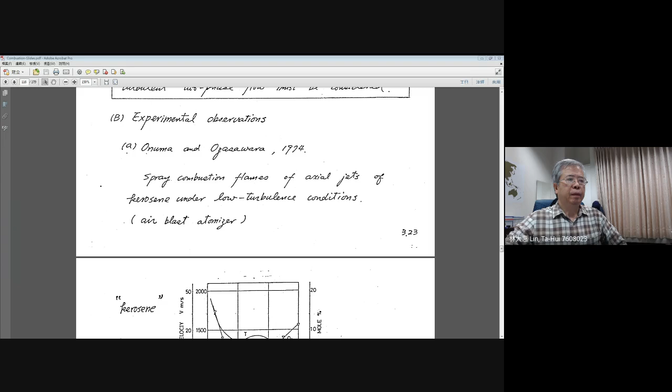Let's turn to lecture note 3.23.

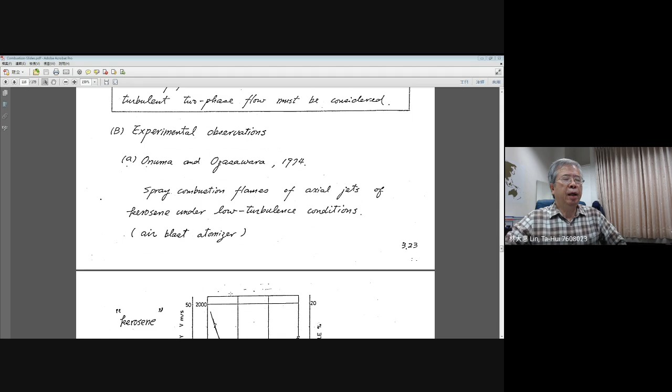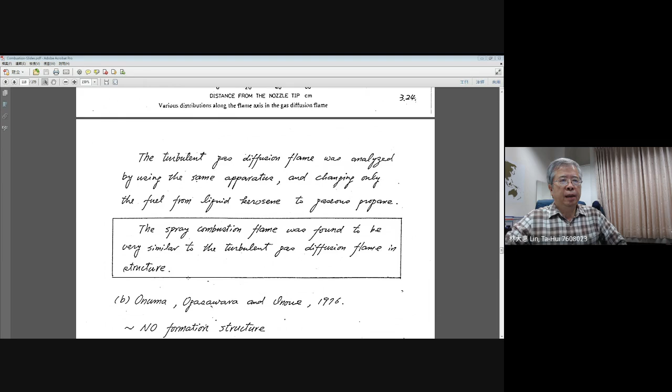We already explained the experimental result from Onuma and Ogasawara in 1974 based on concentration variation, temperature distribution, and fuel and oxygen distribution for a given kerosene spray flame compared with the propane diffusion flame. Based on the experimental comparisons, even for the next paper by the Onuma group in 1976 on NOx formation, they found the spray combustion flame was very similar to the turbulent gaseous diffusion flame in structure. We focus on the kerosene spray made by an air blast atomizer.

This means the spray is well atomized, and the kerosene has a lower boiling point, giving us some understanding of the spray structure. They can easily be gasified to provide fuel vapor to support the spray flame, and they have similar structures compared with the turbulent gaseous diffusion flame.

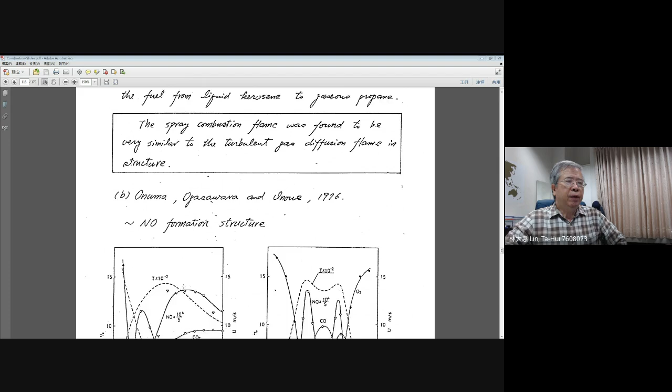But for the next paper, the third paper from the Onuma group, they try to give further understanding using different kinds of liquid fuel. Now they try to use heavy oil instead of the kerosene used before. But for the utilization of heavy oil, because it has a high boiling point, it is not easy to atomize, so people always use some kind of technology for heating the heavy oil.

Therefore, in this experiment, they try to enhance the fuel velocity and atomizing velocity of the atomizing air, and try to reduce the viscosity of the heavy oil by heating it to 100 degrees Celsius at the nozzle inlet. This will help the atomization for utilization of heavy oil.

Now they try to compare the various species concentrations and also temperature concentration for both heavy oil and kerosene spray flames.

Before they do the comparisons, they try to figure out the differences between the droplet number density distribution for heavy oil spray and kerosene spray. This is the initial size distribution of the droplets for heavy oil spray and kerosene spray in the experiment.

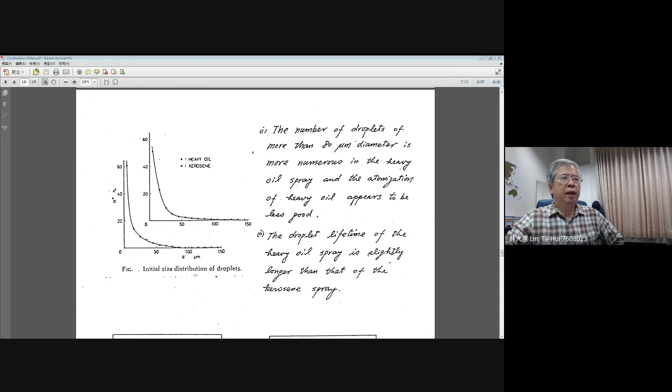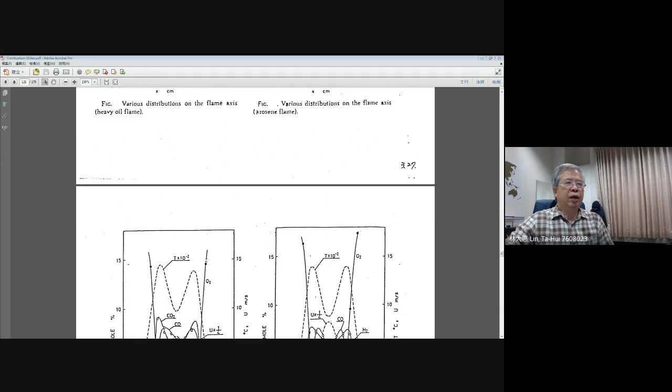They also look further to check the distributions along the radial direction, taking measurements for the cross section at x equal to 10 centimeters, a little away from the exit plane of the injector, to see the symmetric distribution for species concentrations, temperature, and velocities. They find these are quite similar for both cases.

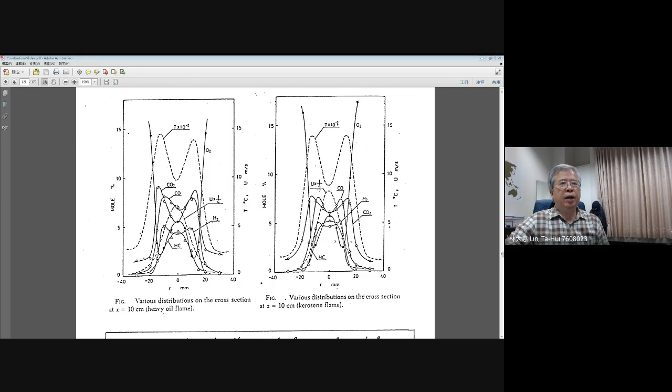They came to an important conclusion: by comparing the flames of heavy oil and kerosene under the same conditions, it was found that the occurrence of droplets is about the same for both flames. This may indicate that droplet behavior is not so different between these two flames.

The flames nearly coincide with regard to length and width, and the major distributions of various quantities are similar for both flames. This conclusion gives us the idea of how to use the gaseous diffusion flame to simulate possible locations of the spray flame.

But you should understand this conclusion is based on their particular experimental arrangement. In the earliest two papers, they used an air blast atomizer to provide well-atomized sprays, and they found similar flame structures for the spray and for gaseous propane.

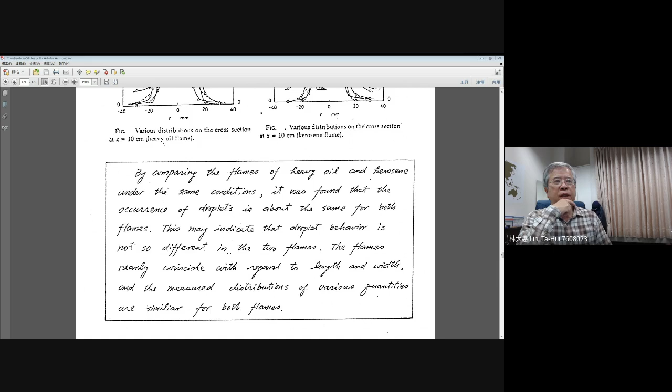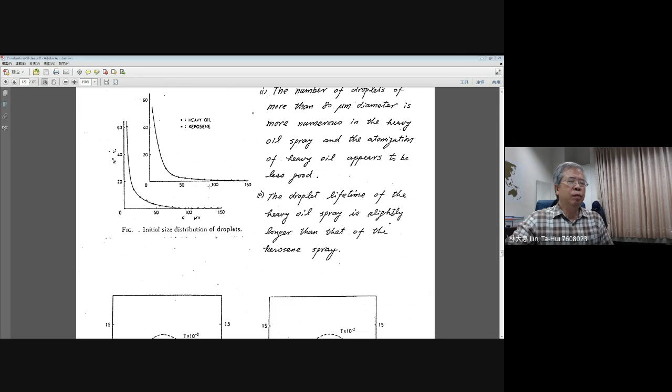For this paper, they try to make the heavy oil have good atomization, so they heat it to 100 degrees Celsius to reduce the viscosity. You can see the droplet size distribution - they almost have the same distribution, except the number of droplets larger than 80 micron shows a slight difference, but not too much. This means the droplet size distribution for kerosene spray and the heavy oil are quite the same.

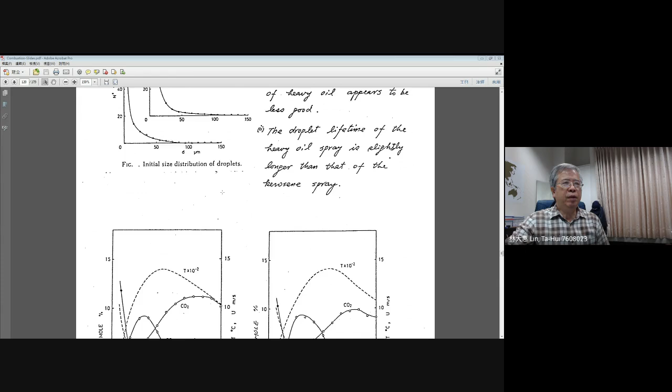In this sense, they may have a very similar spray flame structure. Up to here, they give a clear understanding that in general, if you look at a spray with good atomization, the droplet size distribution moves toward smaller droplet sizes, and they will have a larger spray angle with good mixing with air. Then the overall burning structure can be well described using a gaseous diffusion flame.

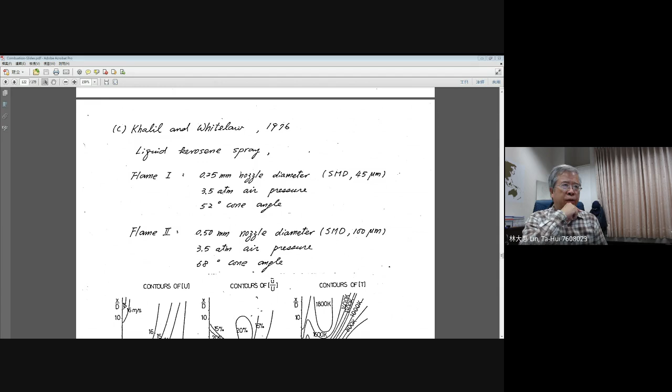But basically, you need to understand the heat release coming from the gaseous fuel should be very similar to that from the liquid fuel. For the next experiment, I will show you some differences in the flame structure comparing the gaseous flame and the spray flame.

This experimental work and simulation was reported by Khalil and Whitelaw in 1976. They considered liquid kerosene spray, using two different nozzles with diameter 0.25 millimeter as flame one, and the other 0.5 millimeter as flame two.

For flame one, they measured the droplet size distributions in the exit plane of the nozzle and found the Sauter mean diameter is around 45 micron. For the other, it's about 100 micron, which means spray flame two contains a larger droplet size distribution compared with spray flame one.

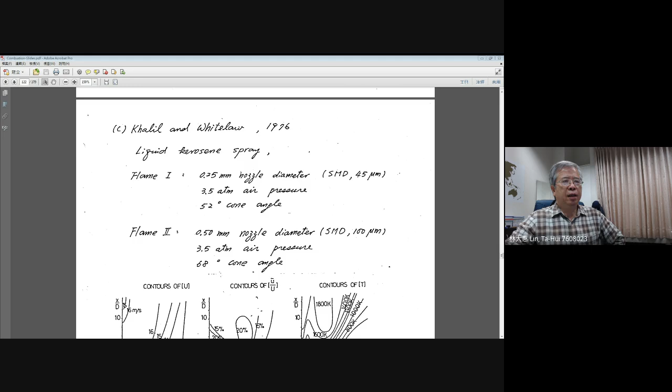They used the same air pressure, 3.5 atmospheric pressure, but the cone angles are different. Spray flame one has a smaller cone angle, influenced by the smaller nozzle diameter. Spray flame two, coming from a larger nozzle, has a wider cone angle of 68 degrees.

Now they perform the measurement and give us the overall flow structure, plotted as contours of axial velocity, velocity fluctuation, and temperature. You can see from this series of experimental observations - now we try to look at the differences between these two spray flames.

For spray flame one, first look at the contour of velocity and the contour of temperature. You can see initially the flow velocity inside the spray flame increases continuously toward the downstream, and there is some kind of boundary - the iso-velocity line shows the velocity decreasing toward the outer environment.

This can be compared with the temperature distribution in the contours of temperature. The isothermal line tells you there is a more dense region for the temperature variation, giving you an idea about the location of the spray flame. You may think the flame exists here, since at the flame location you will have the highest temperature and a larger temperature gradient reducing flame temperature to the surrounding temperature.

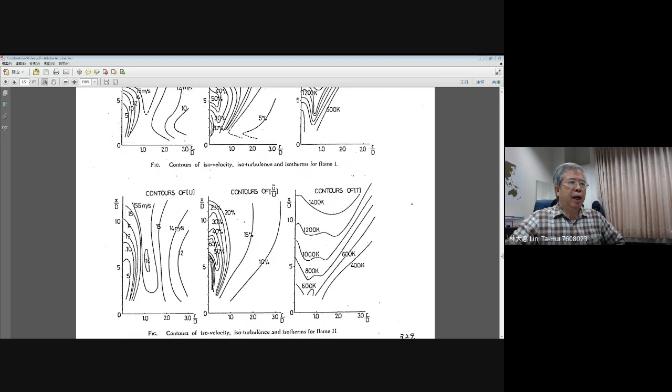50% is the maximum, but it reduces continuously toward the downstream because the droplets gasify and become smaller or disappear, so the velocity fluctuation will disappear. This is the first flow structure for spray flame one. The contours for iso-velocity, iso-turbulence, and isothermal for spray flame two are shown in these three figures.

And similarly, you can identify the spray flame is very close to the spray boundary, and this spray boundary shows this spray has a larger cone angle.

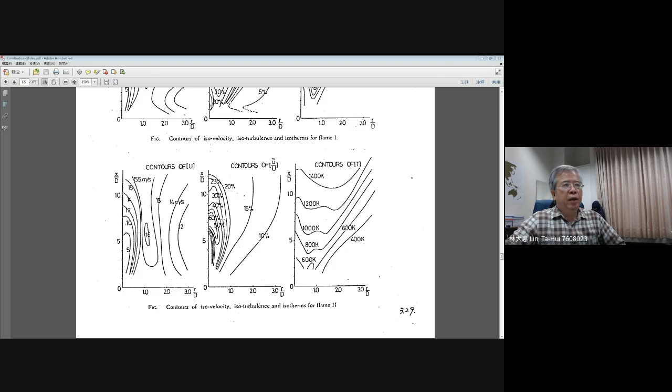Here you can see there is a larger velocity fluctuation in the interior of the spray for spray two. As you remember, spray two has a larger injector size, indicating larger droplets inside the spray cone, so the interaction becomes stronger.

And this still shows the velocity distribution, with the steep velocity variation coinciding with the spray angle.

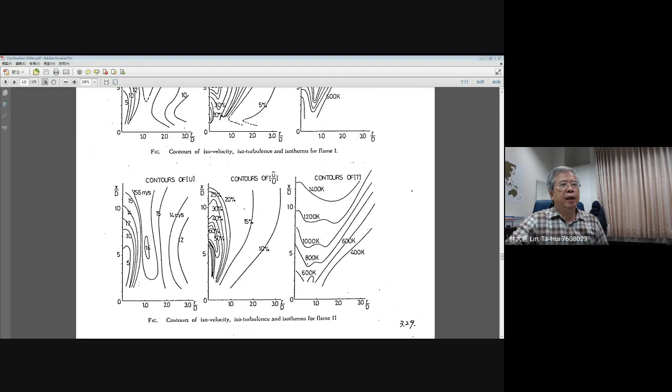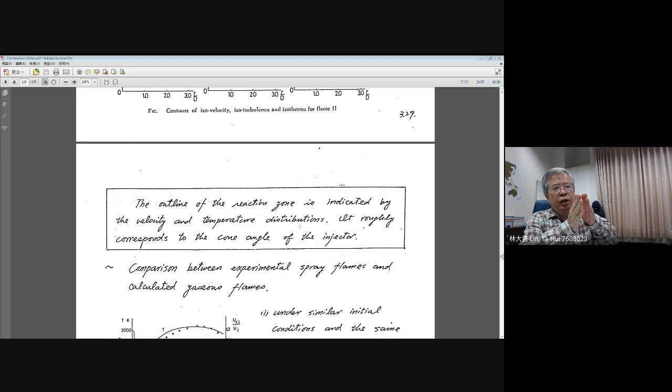From this kind of comparison, they find out the outline of the reaction zone. That means the flame zone, the spray flame, is indicated by the velocity and temperature distributions, especially the very steep variation in temperature distribution, which roughly corresponds to the cone angle of the injector.

These experimental results give some idea that usually the spray diffusion flame is very close to the boundary of the spray core. This is suggested from our previous discussion, because these diffusion flames are supported by the evaporated fuel vapor coming out from the cold core.

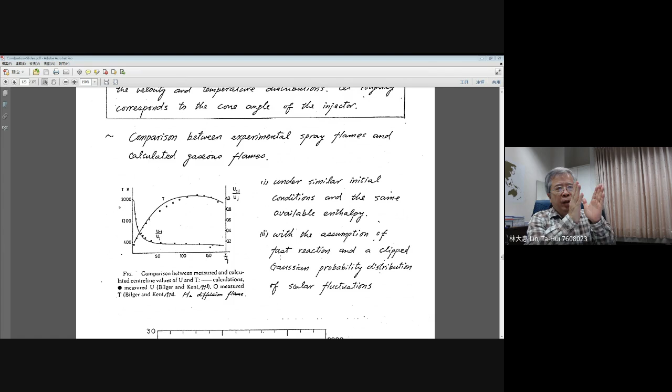The fuel vapor coming out mainly depends on diffusion, so it cannot extend too far. Therefore, the diffusion flame is very close to the spray cone boundary.

For the final experiment in the paper, they try to identify the differences between the structures for the spray flame and the gaseous flame, but they use simulations for comparison. Let me describe the mechanism for the simulations.

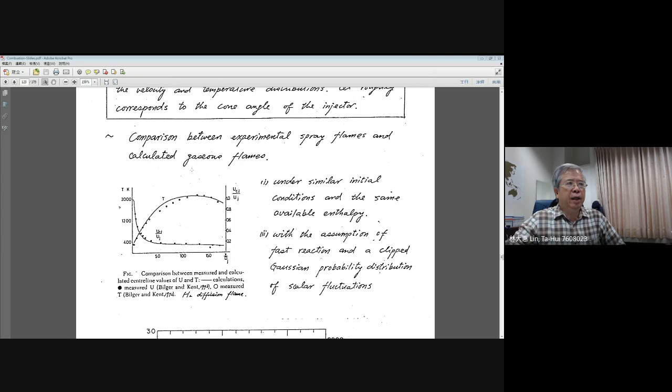They want to compare the experimental spray flames with the calculated gaseous flame. How do they do the calculations? They try to develop their numerical schemes and compare with existing experiment data.

They use similar initial conditions and the same available enthalpy, required for the simulation, and assume fast reaction with a presumed Gaussian probability distribution for scalar fluctuation.

Because they just do simulations on the gaseous flame, they use the calculated gaseous flame to compare with the experimental spray flame.

These kinds of scalar fluctuations are described by a probability distribution, a Gaussian distribution. This simulation mechanism is basically used to compare with experiment data based on the hydrogen diffusion flame.

This is the results, and the experiment data was taken from Bilger and Kent in 1974 for the hydrogen diffusion flame. In the first stage, they try to justify the correctness on their simulation.

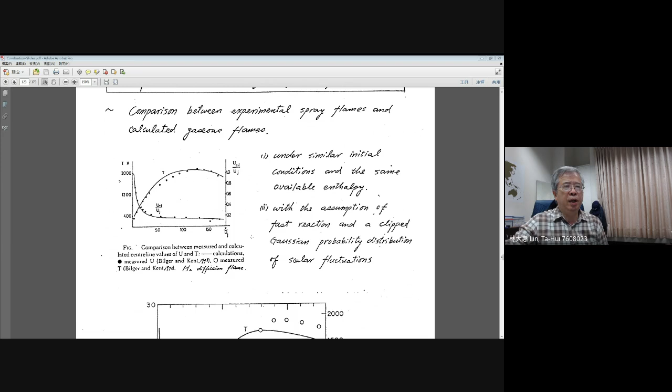Then they go to the next step. They use their simulation mechanism to get results to compare with the results from flame 1 and flame 2.

This is the first comparison, and the solid line curves represent the simulated results, while the open circle symbols and the inverted triangle symbols represent the experiment measurement, especially for spray flame 1.

Here you can see there is good agreement between the simulation result and the experiment result for the axial velocity u.

This is the distribution along the center line, for varying axial positions.

But the temperature is underestimated, especially in the downstream region, and the highest temperature occurs earlier for the gaseous flame compared with the spray flame. The maximum temperature is also smaller compared with that for spray flame 1.

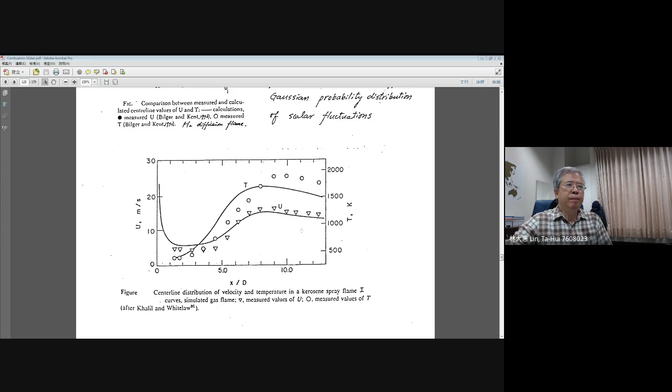Furthermore, they bring spray 1, spray 2, and the gaseous flame together and look at the temperature distribution along the radial direction for given axial positions. The left hand side is the upstream region, and the right hand side, x over d equal to 7.15, represents the downstream region.

You can find the comparison between the calculated results for the gaseous phase, indicated by the curve, and the two measurements from spray 1 and spray 2.

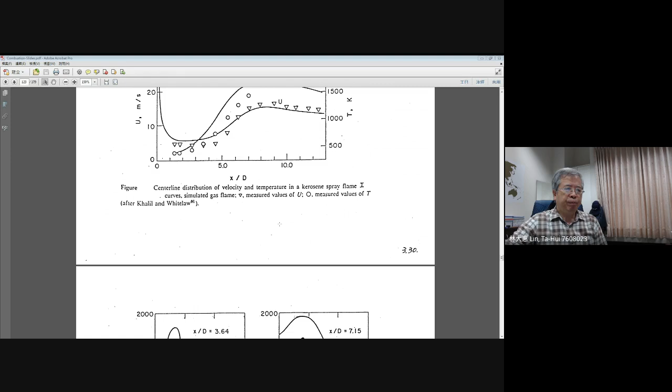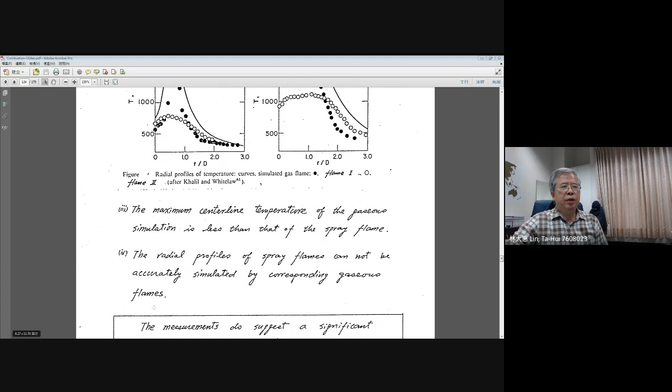When you look at the radial distribution for temperatures, the radial profile of the spray flame cannot be accurately simulated by the corresponding gaseous flame. There's a big discrepancy in the upstream region and also in the downstream regions. The measurements suggest a significant shortening of the flame length as the droplet size is decreased.

The droplet size decreased from SMD of 100 micron to 45 micron. This is confirmed from experimental observation: the flame length is shorter for spray flame 1 compared with spray flame 2, and the simulated gaseous flame is even shorter than the 45 micron spray flame. Actually, the gaseous diffusion flame had the shortest flame length.

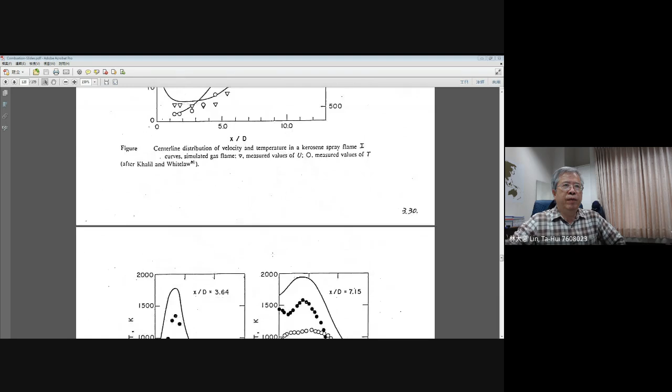These characteristics can be viewed from the temperature distribution. When the maximum temperature occurs, then the temperature decreases, meaning the burning becomes weaker. Finally it disappears, marking the end of the flame length.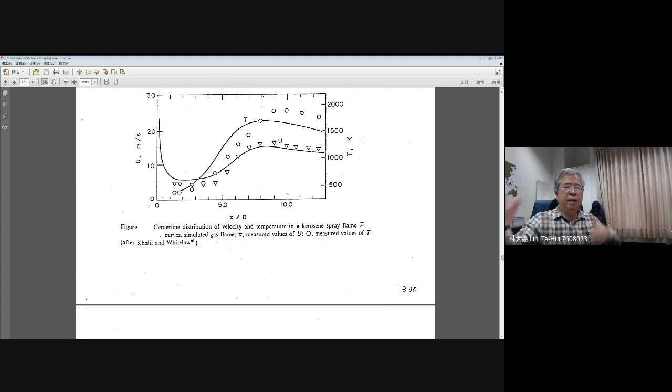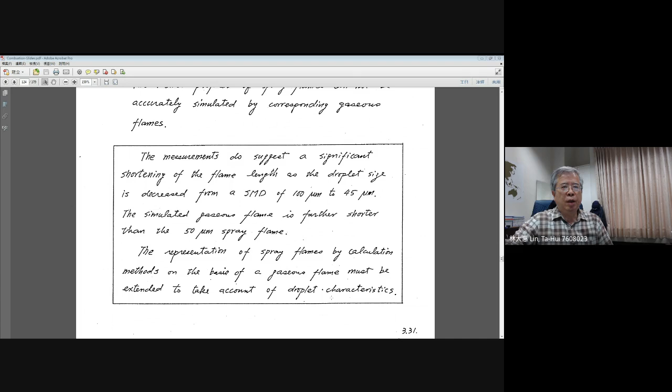The most important observation is that the representation of spray flame by calculation methods on the basis of gaseous flame must be extended to take account of droplet characteristics. This is a very important conclusion to consider, especially when introducing spray with larger droplets.

With larger droplets, you need to think about the droplet lifetime. They will extend their appearance further downstream, which will extend the burning process to a longer distance. That means you need to take account of droplet characteristics.

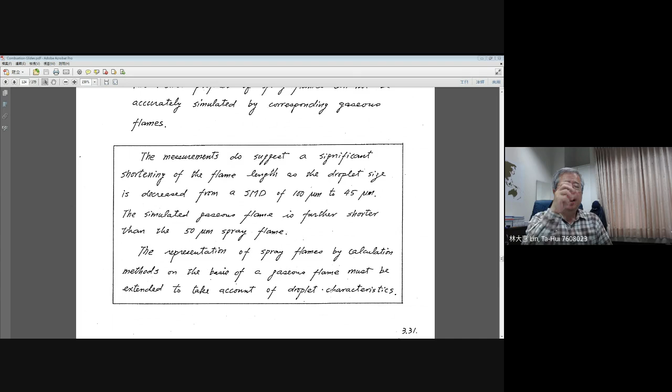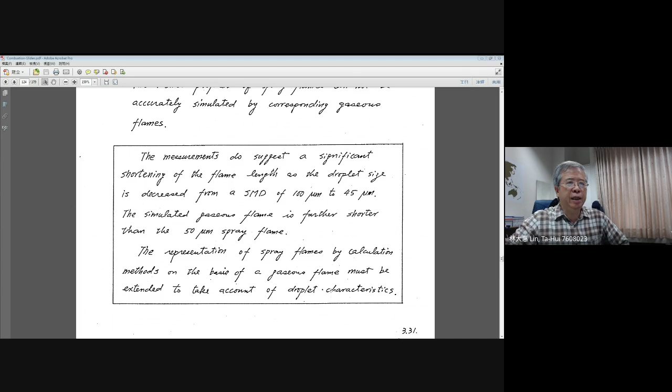By these two comparisons, one experimental result from Onuma's series experiment, the other from the Khalil and Whitelaw experiment, they tell you that in some cases, if you use well atomizers, you may try to use the gaseous diffusion flame to simulate the spray flame in reality. But if your atomizer provides larger droplets, you need to consider their existence because their lifetime is longer and they will extend the burning process to further downstream. You need to consider the droplet characteristics for those kinds of spray.

Finally, I want to give a conclusion, especially introduced by Chigier and Roett in 1972. This is a very nice conclusion you should remember. They try to use the velocity profile at a cross section for a given axial distance away from the injection port to let you know the velocity distributions for different kinds of jets. There is a full comparison.

One is the so-called isothermal free jet, this is a cold jet. The second is an isothermal spray, a cold spray injecting out. The third is a spray with combustion, meaning a spray flame with a spray core. And finally a gaseous diffusion flame, purely gaseous fuel burning. They bring these four jets together to investigate the velocity distribution for each, to let you have some comparison.

But the main idea is this: they try to introduce a so-called distribution function for the velocity profile, expressed by an exponential function. The left-hand side represents U, the average axial velocity, capital U bar, and in the denominator represents the maximum axial velocity, which occurs at the center point, at r equal to 0 along the center line.

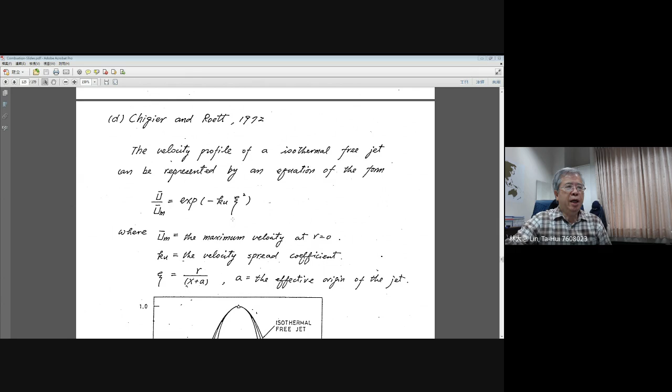The most important thing is the Ku, which represents the spread coefficient, velocity spread coefficient. If you have a large Ku, that means the velocity is more concentrated in a small region. But if you have a small Ku, that means the velocity distribution will spread to a larger region.

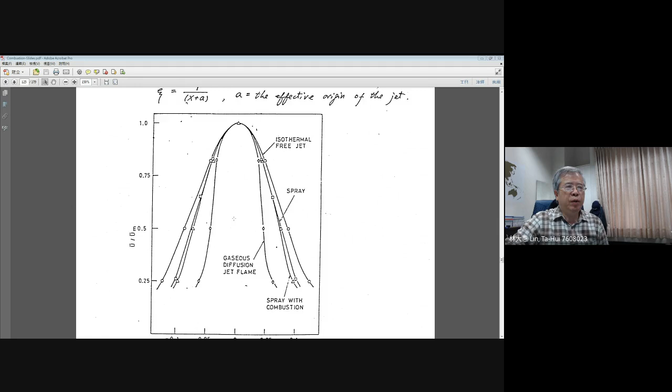For example, for the isothermal free jet, indicated by the diamond and circle, they have a smaller Ku, around 92. For the isothermal spray, indicated by the square symbol, and the triangle symbol representing spray with combustion, both are very close together, equal, and the Ku is approximately 130. 130 is larger than 92.

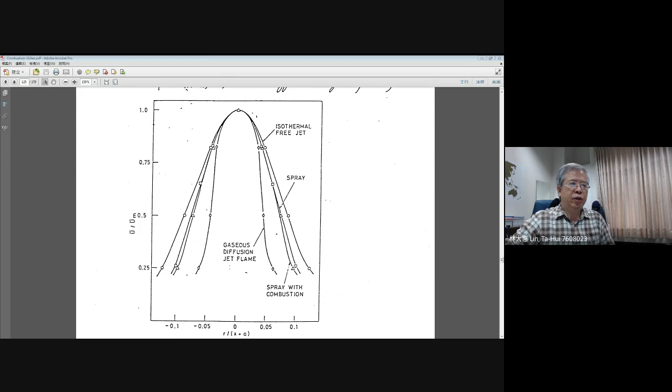That means the velocity distribution spreads wider compared with the gaseous diffusion flame. The gaseous diffusion flame has Ku equal to 360, but isothermal free jet has the smaller Ku, giving a wider spreading. The gaseous diffusion flame, the diamond shaped curve, actually has a larger Ku value.

Now let us try to understand the differences between these four jets. The first one, we try to consider the isothermal spray and also the isothermal free jet. Isothermal free jet Ku equals 92.

You can see the line with the open circle, and the spray is around here. The isothermal spray has a larger Ku compared with isothermal free jet, 130 compared with 92. The reason is the droplets of isothermal spray retain their momentum for a longer period of time compared with the equivalent fluid particles of isothermal free jet.

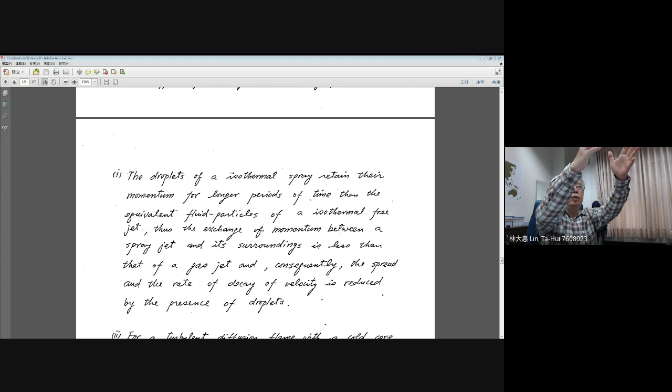That means the exchange of momentum between the spray and the surrounding is less compared with the gaseous jet, since the droplets have inertia and continue forward to the downstream. The spreading in the radial direction is less compared with the gaseous cold jet. Consequently, the spread, or the rate of decay of velocity, is reduced by the presence of droplets. This is the first comparison between the isothermal free jet and isothermal spray.

Those curves are confirmed by experimental data, and for the isothermal spray, the data came from Hestroni and Sokolov in 1971. This is the first comparison for the cold jet of gaseous and spray.

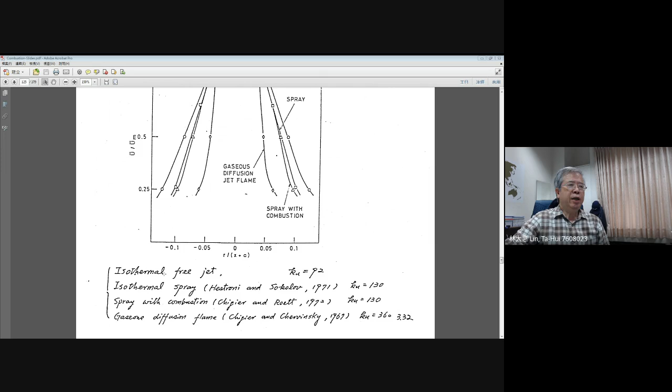The next comparison is for the turbulent diffusion flame with and without burning. We look at the gaseous jet with and without burning. The gaseous cold jet, represented by the isothermal free jet, has a larger, wider spreading.

But for the gaseous diffusion flame, they have the smallest spreading. It's definitely easier to see when you have a flame, and you generate a flame, the flame is always very close to the boundary of your jet, as we described for the jet diffusion flame.

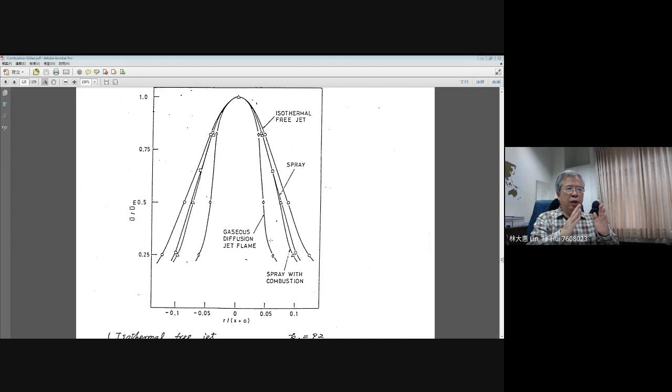This flame has the highest temperature at its location, and this flame will have some thermal expansion to prevent the gaseous jet, the inner gaseous jet, from mixing or expanding to the surroundings. This means that when a diffusion flame exists surrounding the cold jet, this high temperature boundary will push the cold gases and try to resist the expansion of the cold jet.

So this is the comparison: the gaseous diffusion flame has the largest Ku, equal to 360, and it cannot have wide spreading for a given axial position.

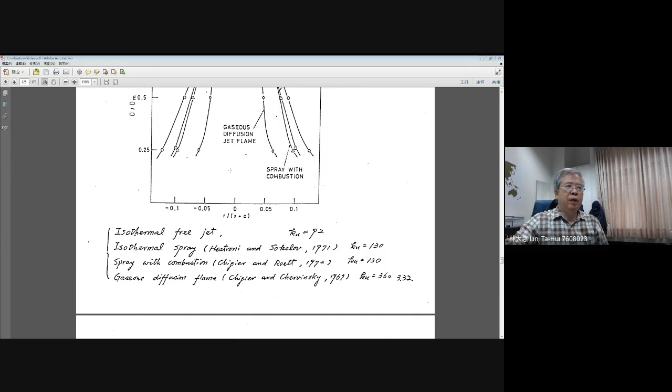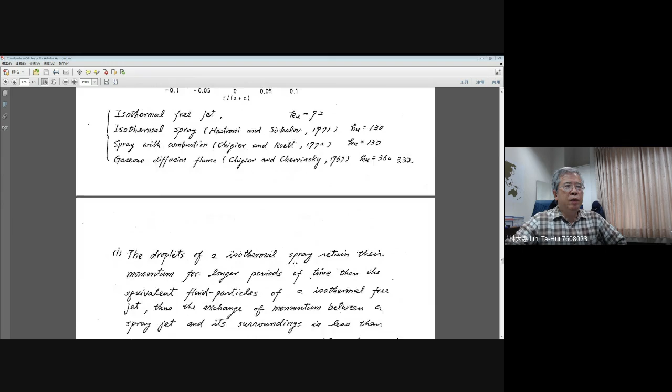Finally, the comparison between the cold spray and the burning spray: there are two curves, one indicated by a square symbol and the other by a triangle symbol. Actually they are almost the same, which means the spray diffusion flame is almost attached to the boundary of the spray core.

The value of Ku in the burning spray is closer to that of the isothermal spray. This indicates that in the region of the spray where Chigier and Roett's 1972 measurements apply, the effect of the presence of droplets was dominant and more significant than the presence of flame, meaning that when you still have a spray, the fuel vapor supplied by the droplets becomes more important.

Since in the whole region of the spray core they have gasification from beginning to end, they continuously provide fuel vapor. That fuel vapor needs to be supported by droplet gasification, meaning the supply and diffusion of fuel vapor is limited by the gasification process of the droplet.

Those fuel vapors cannot be strong enough to push the diffusion flame away from the spray core boundary. So the spray diffusion flame is always very close to the spray core boundary, because they are waiting for enough supply of fuel vapor coming out to maintain the spray flame burning.

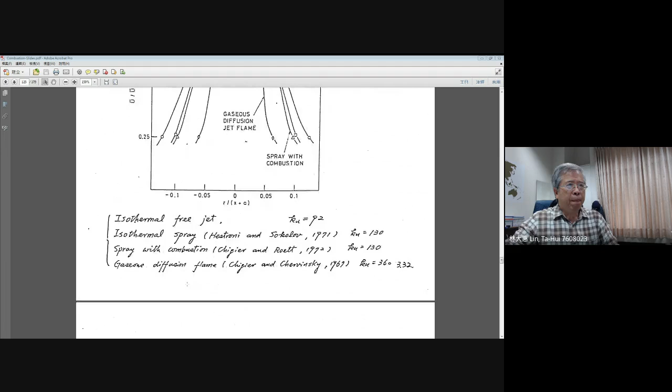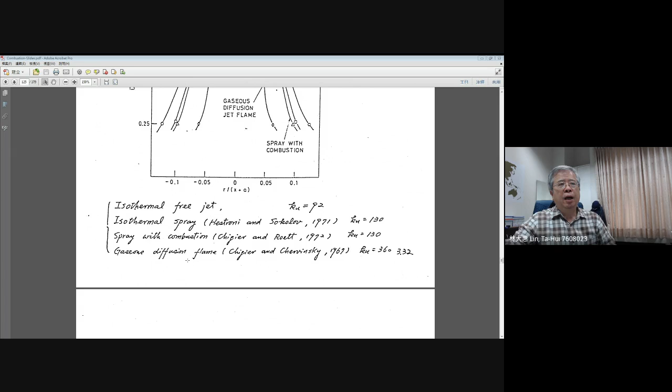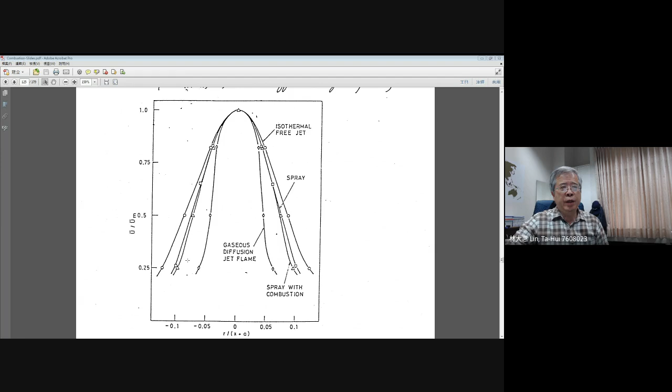I think these figures are very important to let you know the differences: the first one is the cold gaseous jet compared with the cold spray, and also compared with the combustion spray and the combustion gaseous diffusion flame. I hope you can keep these figures in mind, to remember how to justify the flame location compared to the location of your spray core, and also the jet boundary.

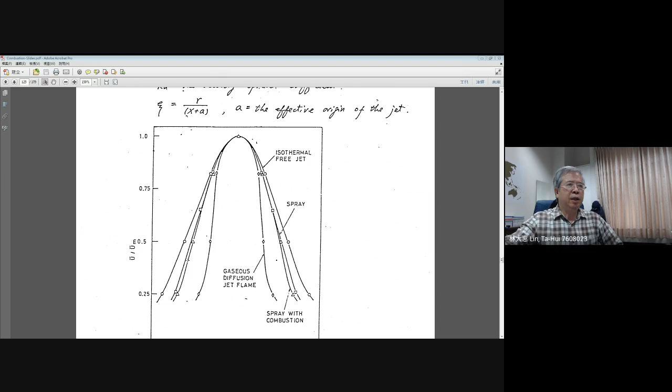Those kinds of conditions you need to understand, so you can use them to evaluate different kinds of jet configurations and burning jet configurations. I think we close the discussion for the spray diffusion flame, then we move a little bit

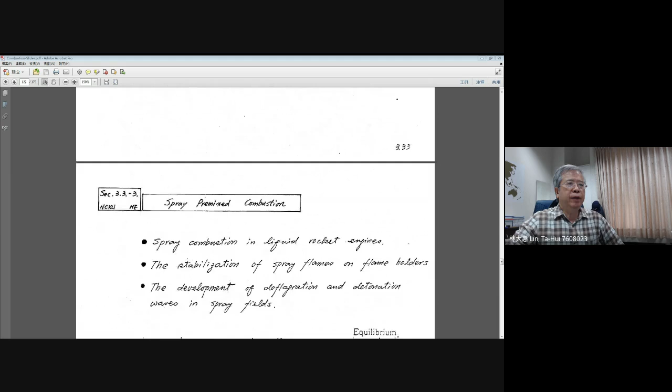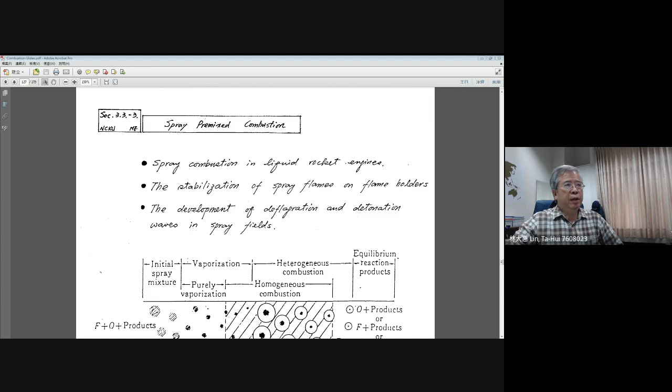to the so-called spray premixed flame combustion. I will not spend too much time describing it because it gets more involved, since we need to introduce asymptotic theory into this result. But I will just tell you the possible structure you may have.

The spray premixed combustion is usually used for the liquid rocket engine, as I described earlier, because they use many injectors for liquid fuel and liquid oxidizer, providing easier mixing between the liquid fuel and liquid oxidizer, which then get gasified and mixed together.

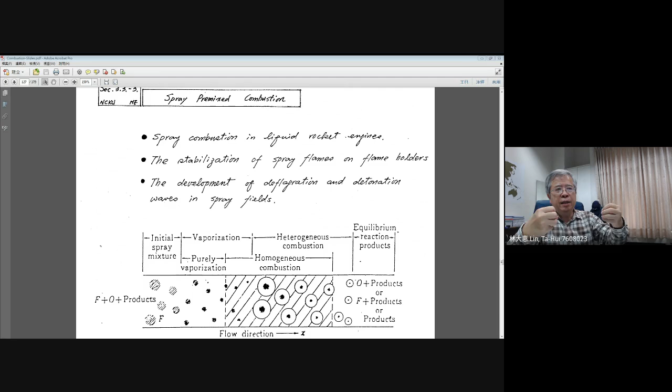In an application sense, they have good mixing for the liquid fuel and liquid oxidizer, and the burning structure may appear as a premix flame. Another application is the afterburner we described for aircraft, with the stabilization of spray on flame holders.

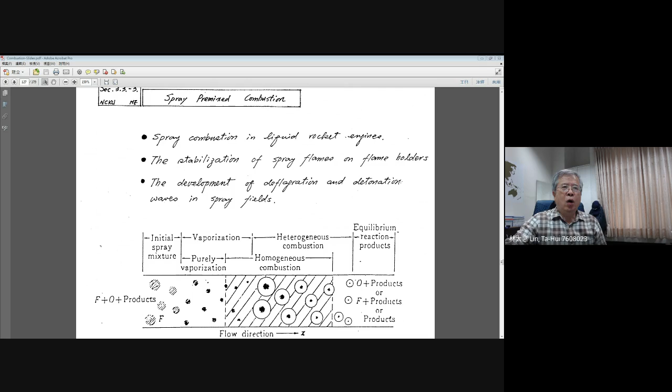Those kinds of premix burning for the spray give you the so-called flame propagation, so you need to go back to the premix flame features and describe the so-called deflagration and detonation waves in these premix spray fields.

I will simply describe the possible burning structures you may experience, configurations proposed by Williams back in 1985. This is his book, the classical book for us, Combustion Theory, written by Williams. F.A. Williams is very famous, a top figure in the combustion field.

Now look at these structures. The idea is this: we assume there is fuel and oxygen, and maybe some products, since other regions get involved with products after local combustion, and they move from the left hand side to the right hand side. Simply say that the oxidizer is already evaporated, so you may have the fuel droplet with fuel vapor occurring in the upstream region.

They show you the initial spray mixtures, and after they travel a certain distance, a certain plane, they experience the flame and chemical reaction, releasing heat. As you remember for premix flame, if a flame exists, there is thermal diffusion to the upstream side. That energy gives heat to the fuel droplet, which starts

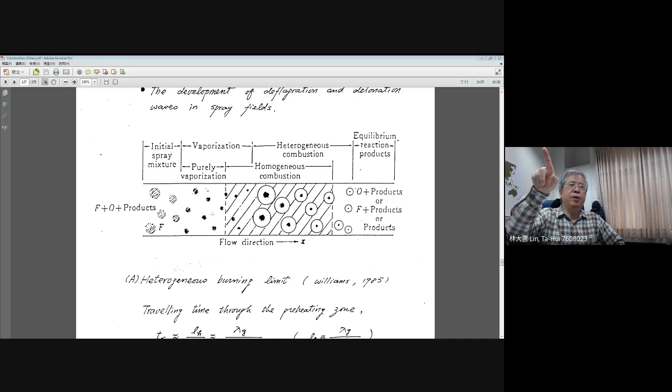When you reach the ignition temperature, certain droplets will be ignited as single droplet burning. Then for these regions, they get involved with bulk homogeneous combustion, which refers to premix burning because in the upstream side you already have fuel vapor coming out. That fuel vapor will premix with oxygen in the upstream zone, giving you premix structures in these flow regions.

Then the temperature is high enough, and the bulk premix flame is ignited. This belongs to the so-called homogeneous combustion. Homogeneous means that in that flow field you just have a single phase. In this sense, this region represents gaseous burning, homogeneous burning.

But in this region you still have a certain amount of fuel droplets, and those fuel droplets, when they move into this region, will reach the ignition temperature, then single droplet burning will occur. Now, when bulk homogeneous combustion gets involved with many tiny droplets burning, you will have a so-called heterogeneous combustion.

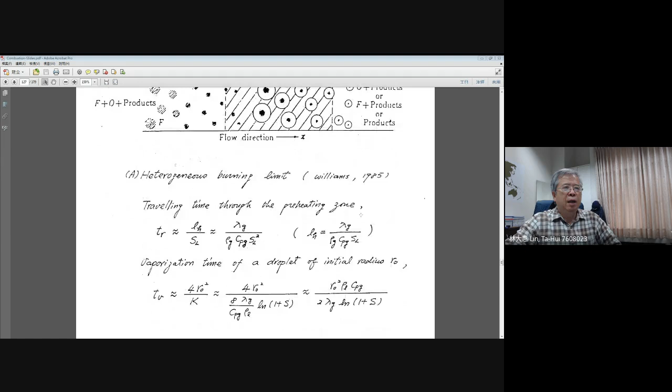I will try to give you some understanding, because they get involved with very complex calculations for this model. But anyway, we will describe it in the next part.